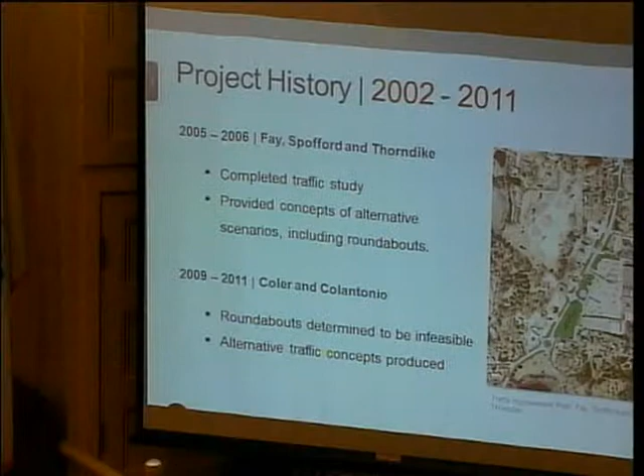I just wanted to remind everybody that back in 2002, we had the Lower Village Committee formed, and that was a subcommittee of the planning board. And their major task back then was to provide some visual improvements and improve the functional and safety capacity of the Lower Village corridor. And that committee lasted for about 9 years, as you can see, through 2011.

Some of the major things that happened during that time that helped get us to this point was in 2005, 2006, they hired a group called Fay, Spofford, and Thorndike, and they did the initial traffic study. So they were the first ones to do the traffic counts and to get an idea what the speeds were. They were also the first group that came out with different alternatives, including the roundabouts that I know had kind of circled for several years.

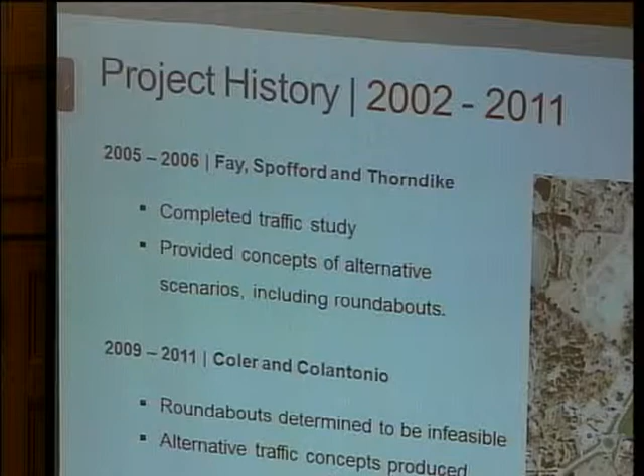It wasn't until 2009 when Coler and Colantonio, another group, came in and really tried to figure out whether or not those roundabouts were feasible. And it turned out that due to site-specific constraints, due to all of the things that were happening at that intersection where we thought the roundabouts might work, it was just too much. And so that idea was abandoned, and they moved on to some different alternative concepts. And so Coler and Colantonio had produced the last concept plan. Some time had passed. We really had a chance to look that plan over again, and it's helped us get to this point. So we can go to the next slide.

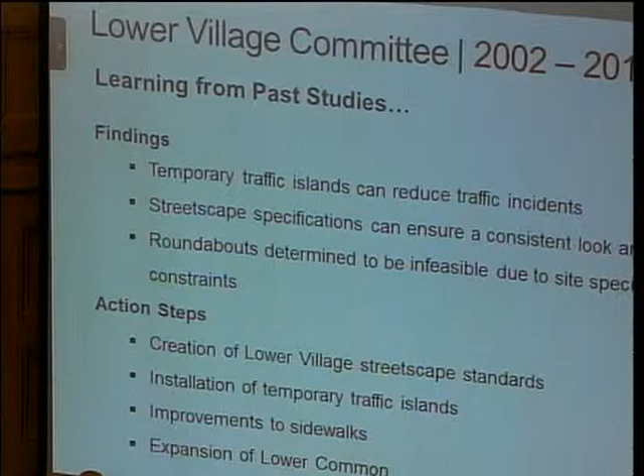So during that time, a lot of things actually came to the surface. Some of the big findings from those 9 years on the committee were that the temporary traffic islands out there that we know and love actually did reduce traffic incidents. Some of the streetscape specifications, down to just the width and the spacing of the trees and the fences, that came from that committee. And they also came up with some action steps as well, creating those streetscape standards, getting those islands in, making improvements to the sidewalk.

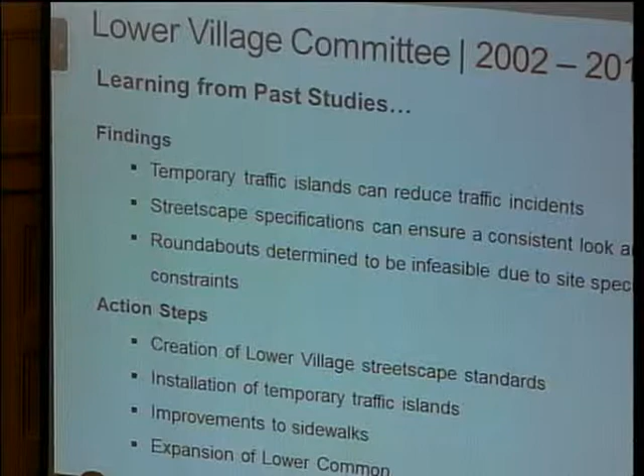I know that's when the Lower Village Common was expanded a little bit, and some things happened over by Gardner Road. So some things definitely happened during that time, but certainly things have been moving faster since we've gotten involved with Howard Stein Hudson, and we decided to take a better look at these concept plans. And they are going to talk to you a little bit about some of the research that they went and did, again, because it had been so many years, and I think we've really got a fresh look at what's going on in Lower Village and a really realistic idea of how people are using it on a day-to-day basis.

So I'm happy to have worked with them. So I'll hand it over to them now. Howard Stein Hudson, Joseph San Clemente and Bridget Myers, who we've both been working with, and they'll take it from here. All right, great.

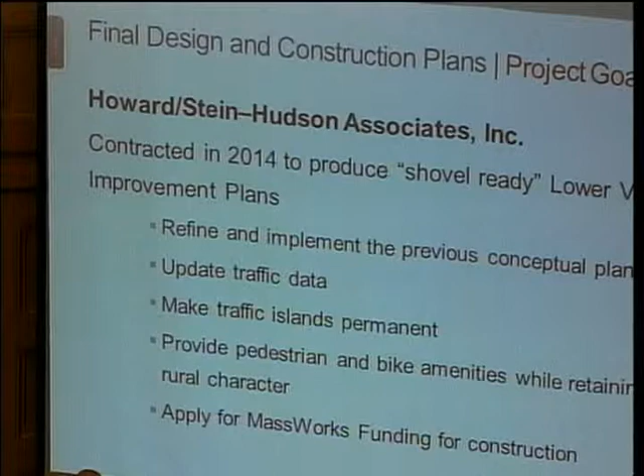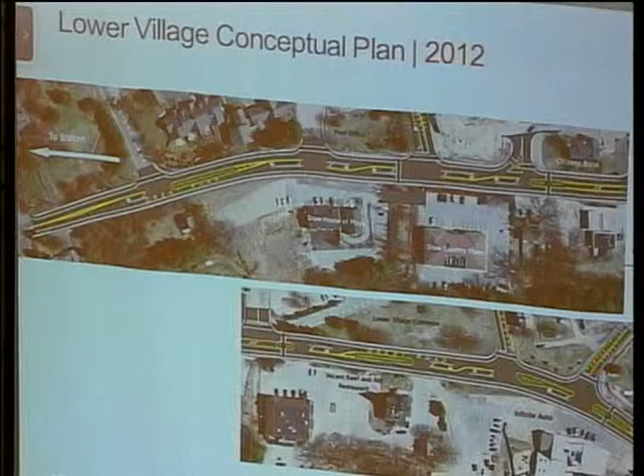And we looked at this and we said, well, let's try to make this a real design plan, moving in with actually collecting land survey data that shows us where the right-of-way is, where property lines are, doing a much more detailed data collection and observations. We're out here during the weekday morning and evening peak periods, and we also came out during a Saturday midday to observe how are left turn conditions, what are pedestrian and bicycle conditions like, what are the queuing conditions.

And we also took a look at vehicle classification. How many heavy vehicles do we have on the roadway? How fast are people traveling? And we also looked at crash data to understand if there are any safety issues along the corridor that we should be aware of. All along while working very closely with the town planning staff and the public works to really understand what some of the key concerns are as we work to refine that concept into a design plan.

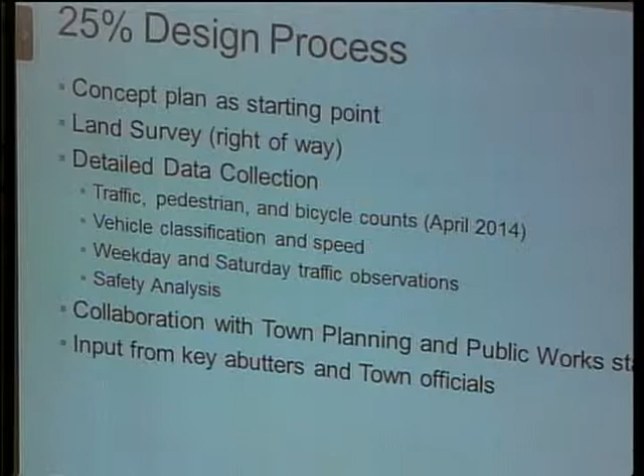And we had also had several meetings with some of the key abutters. I know that the planning staff had additional conversations with planning board members, some of the residents in the area, and we've been getting this feedback pretty much every day over the last couple months as we make small tweaks to the plan to keep moving it along.

So I'm just going to quickly go through some of the data collection efforts that we did and talk about some of the observations that we made. I think a lot of these findings were identified in some of the previous efforts, and if anything, this may either confirm it or expand upon some of the findings that were done before. But we did very detailed data collection.

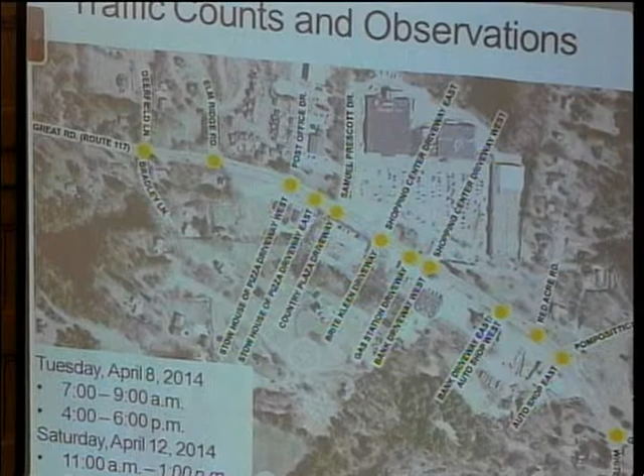These are turning movement counts, counting every vehicle, pedestrian, or bicycle that went through each of those yellow dots in the corridor. There were 12 of them. We counted every driveway and roadway from Deerfield Lane all the way to White Pond Road. And we also conducted continuous traffic recorder counts. Those are the tubes that go across the road so we can monitor traffic over a longer period, not just during the peak hours.

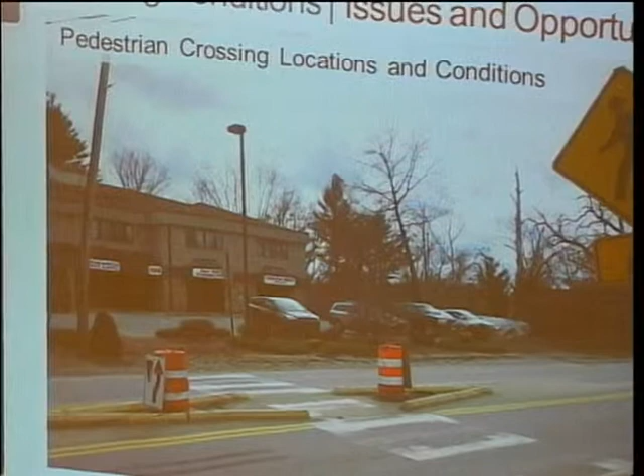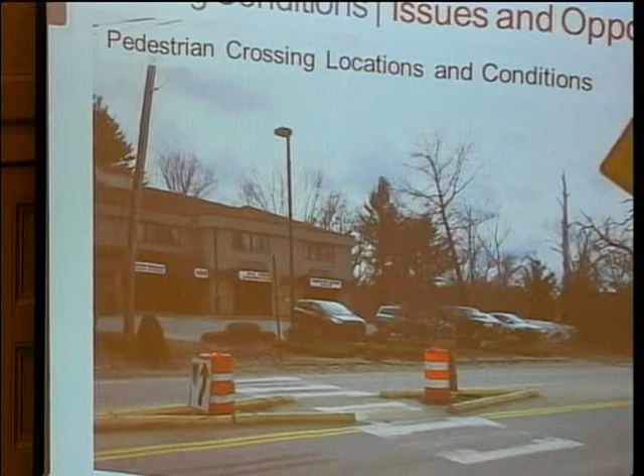Some of the issues that are out there are the pedestrian crossing conditions. Really taking a hard look at where you have crosswalks. There are 3 crosswalks out there today. We do feel that the addition of the temporary traffic islands have been beneficial at maintaining lower speeds in Lower Village, and it does provide some refuge, but it's still a temporary refuge. You don't quite feel that great in the middle of the roadway while you're out there behind the barrels and the curb.

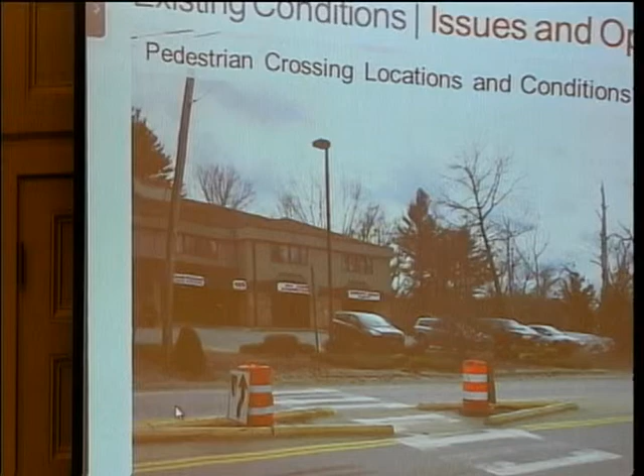Meanwhile, there are some other obvious deficiencies out there. You have a sidewalk along the north side of the roadway, but really it's pretty discontinuous on the south side of the roadway. This particular crosswalk leads into a planted shrub area. It's not really a great connection between the businesses, nor is it handicap accessible.

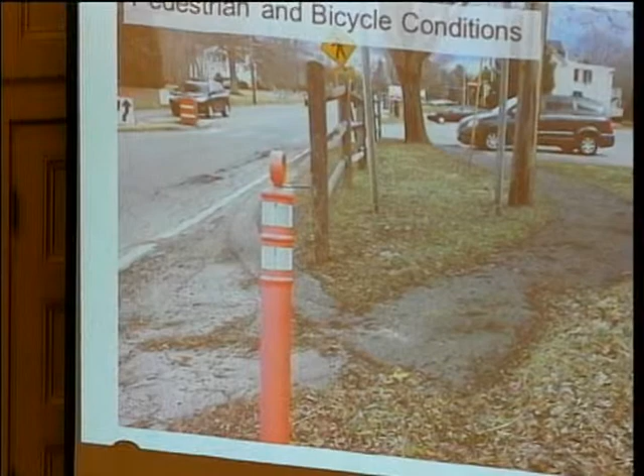Bicycle conditions in the roadway are very minimal. If you're a cyclist, you're really pretty much forced to be in the roadway, which doesn't have any shoulder. The fog line, as you can see, is right along the edge of the roadway. So it's not a great place, even if you're a very experienced cyclist, but it's going to deter anyone that's not an experienced cyclist that's out there.

Meanwhile, this sidewalk is on the south side of the roadway, and it's one of those small discontinuous pieces that kind of meanders around a telephone pole and isn't really in the best shape.

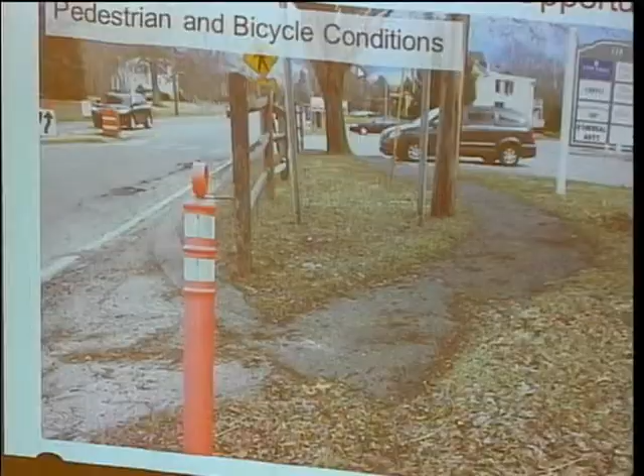Meanwhile, access management is another concern that we have. There are a lot of driveways along this corridor. If you're a pedestrian or cyclist or even a motorist, it means that there's a lot of places where vehicles can be pulling in and out of, which really adds some uncertainty to the roadway. When you're driving down the roadway, where's somebody going to turn in or out of?

If you're a pedestrian walking down the roadway, if you envision that you're adding a sidewalk on the roadway, you don't want to have a lot of these conflict points. We like to try to reduce the number of access points so that it's clear where vehicles are turning in and out of and where they're not.

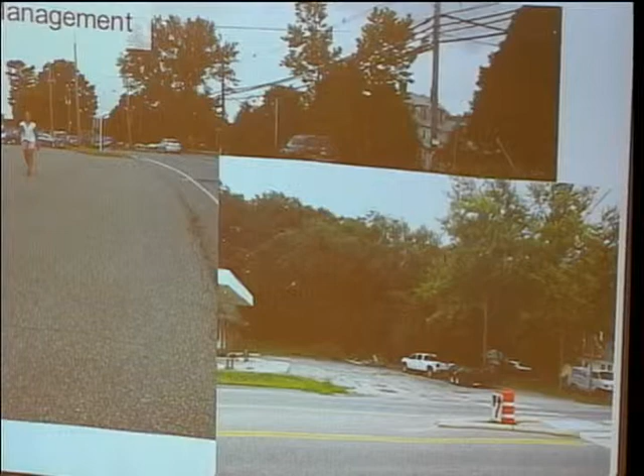Some other issues are down over Red Acre Road and Pompositticut Street, where we have a lot of turning accommodation along the corridor. For most of the corridor, we have a two-way left turn lane, meaning you can turn left in either direction, or we have dedicated left turn lanes. But actually, where you really need the turn lanes, Red Acre Road and Pompositticut Street, you actually don't have a turn lane.

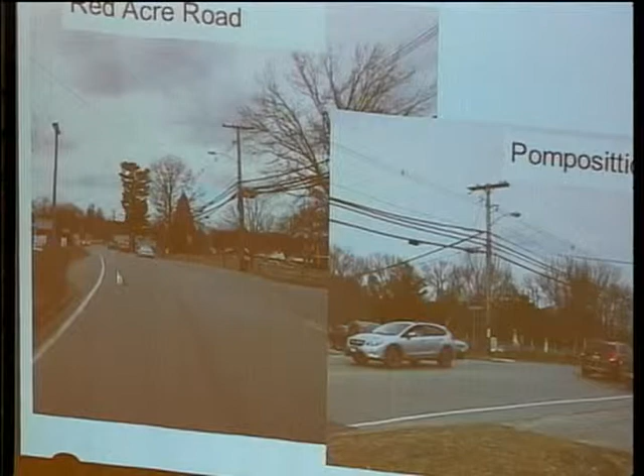It's interesting that we saw this little carve-out near Red Acre Road on the south side of the roadway where a car can just sneak in there and get around somebody making a left. Meanwhile, down at Pompositticut, you have the auto body, the huge curb cut, which actually ends up just functioning like a bypass roadway so people can get around it.

The drainage is definitely something that needs to be upgraded out there. We have undersized drainage line. And the line that is out there, it's a very antiquated pipe. It's in rusted condition, really poor shape. And that's something that we would be addressing as part of this project.

You could see some of the ponding that occurs in the roadway, and asphalt, once it gets wet, you have ponding that just starts to break up. I imagine that those potholes are just going to keep growing over the next few months.

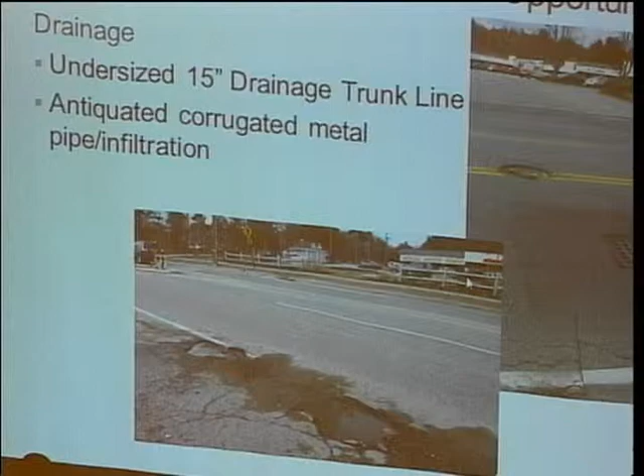And one of the other issues, too, are some of the catch basins. You have catch basins that are in the middle of the roadway, and there's not a lot of curbing on the roadway, so there's nowhere to guide that water and get it off the roadway. We typically like to see catch basins up against curbs to collect that.

So as we started going through some of the data that we collected, just some interesting facts about what we saw out there. Traffic volumes. There's about 16 to 17,000 vehicles a day that travel along Great Road, which is pretty moderate for this type of roadway. It's a major arterial roadway.

But interestingly, in the last 8 to 10 years, the volumes really have not substantially changed. They've remained relatively flat, and this is something that we've seen pretty much statewide, where traffic volumes have actually gone down in the last few years and stabilized over the last 10 years or so. Whether it be fuel prices or the recession or people choosing other alternatives, I'm not sure, but we have seen a lot of volume stabilize everywhere.

The travel speeds, the posted speed limit's 35. The average speed is actually a little bit lower. Most people are going slightly lower, but what we really like to look at are what are the outliers. 2 in the morning, do we have people doing 70? And the good news is that we really don't.

We did not see a lot of excessive speeds. The 95th percentile, these are the top 5% fastest people on the roadway. They're only going 40 miles an hour, 5 miles an hour over the speed limit. So whatever it is that's out there is working.

I think that the splitter islands that act as pedestrian refuges do seem to be helping out there. There's some activity on the roadway that does slow things down. In terms of overall safety, we're not seeing a lot of crashes on this roadway. There were only 28 crashes at all 12 intersections over a 3-year period, which is very low. And when we look at it in terms of the rate of crashes, it's extremely low versus the statewide average.

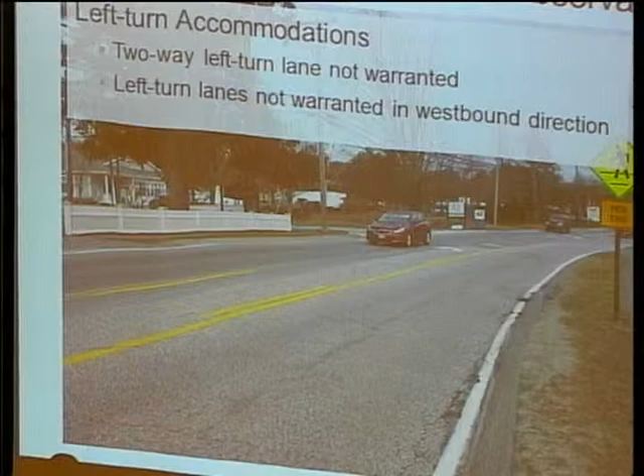For the turn accommodations, we looked at left turn volumes at every single driveway and roadway along the corridor. In order to install a 2-way left turn lane, which is what you have for most of the corridor out there, you need to hit certain warrant requirements. Basically, a certain percentage of left turns versus opposing volume to make it justified to put it in. And what we found out is that the 2-way left turn lane is really not warranted. And actually, by watching operations in the 2-way left turn lane, we found that it's really not functioning that well.

In most cases, when you're down in the west end of the corridor near Deerfield Lane, the lane is simply too small. I think it goes down to about 6 feet wide. A car is about 6 or 7 feet wide. And we're actually seeing cars getting halfway in the turning lanes and blocking the through traffic. So a lot of the turning lane accommodation that we have out there is simply inadequate.

And further, what we found is that if we were going to get rid of the two-way left turn lane and do dedicated left turn lanes into businesses or roadways, there were none required or warranted in the westbound direction. So that means left turns into the south side of the roadway. The only place that a left turn lane was required was the eastbound direction, which makes sense. We have the shopping plaza and the post office, where you have a lot more demand going to.

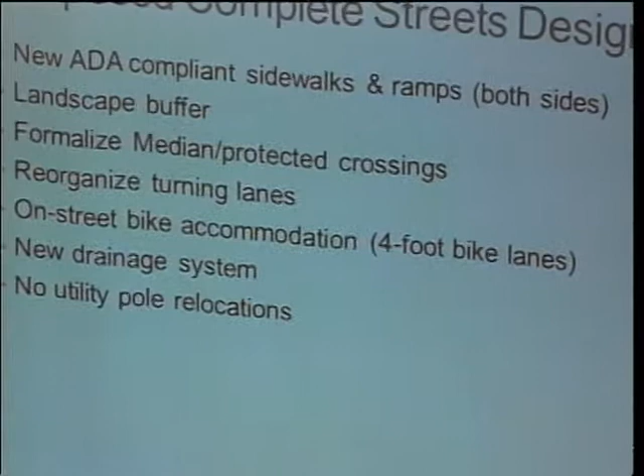So what we propose is a real complete street design for the corridor, improving the roadway so that we have ADA compliant sidewalks, and a bicycle accommodation, which means a 4-foot bike lane, so that those advanced cyclists can get out of the way of the vehicles but have a safe place to be rather than in the middle of the roadway, and they don't have to go on the sidewalk. They have a place to be. Reorganizing all the turn lanes, rethinking where we need turn lanes and where we don't, so that we can reallocate that space for the other users, and providing a landscape buffer.

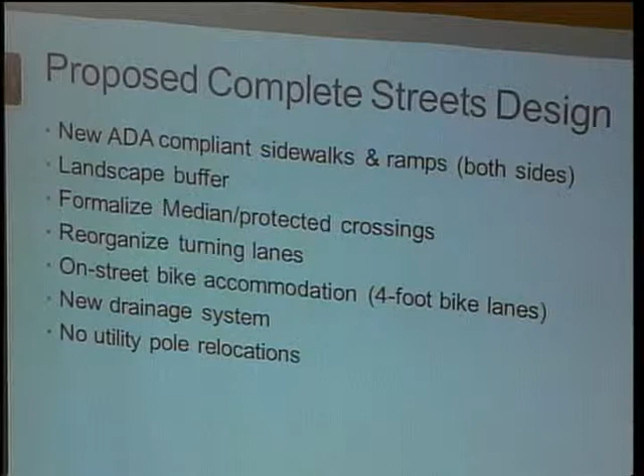So you still have that feel of the roadway, and it separates the sidewalk from the roadway, so you don't feel like you're right on the edge of the roadway when you're walking down the street, and provides some opportunity for landscaping. Updating the drainage system is going to be really important as part of this. And we were able to do all this without relocating any utility poles, which was a heroic challenge; Bridget was able to fit this cross-section in without moving them. Utility pole relocation is expensive and time-consuming, and we were able to squiggle the roadway through, if that's a good word for it.

So I apologize if this is small at the end of the night.

I'm happy to, if you want to see the slide again and come up closer, or I can point it out on the board. But basically, overall what I want to start by saying is that the right-of-way that we have out there is very variable. Often when we work on a roadway, there's a standard 60-foot wide layout or a 40-foot wide layout. But the layout that the town owns for the roadway varies anywhere from 50 to 75 feet. So we had some challenges where the right-of-way changes.

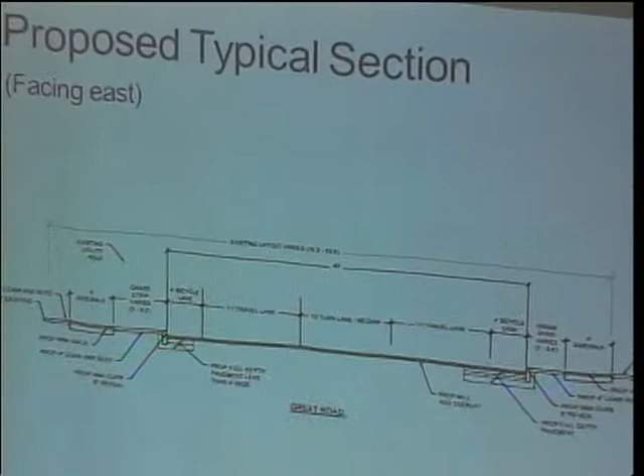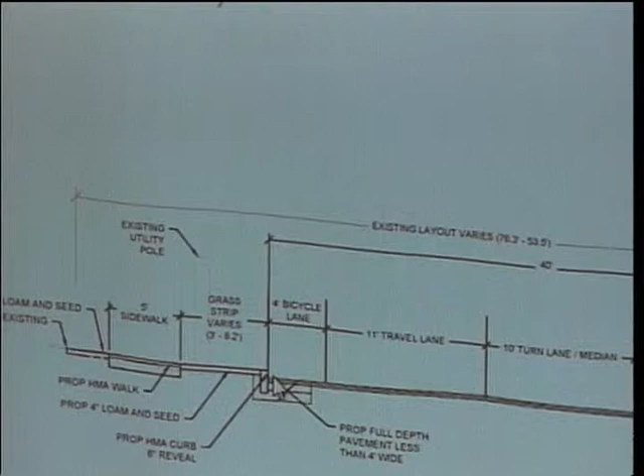We're looking at doing 11-foot travel lanes in the middle, with either a 10-foot turning lane, or in some locations a median. In some cases the median would be raised, in some cases it would be a painted median. And I can go into detail with that. We'd have a 4-foot bike lane, and then we're looking at a raised curb on each side, but it would be an asphalt curb. That would be the black curbing, not granite.

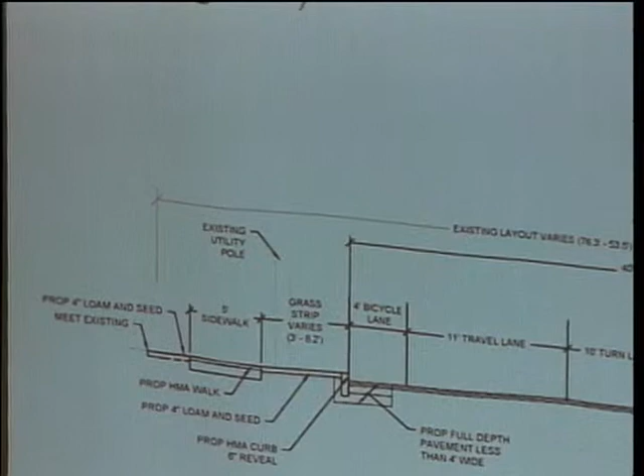And then there would be generally at least a 3-foot grass strip on each side, separating the 5-foot sidewalk from the roadway. In some cases, that grass strip will get a little bit bigger as we work to meander the sidewalk around the utility poles, so we don't have to move any of those. There are 4 pieces of the plan that I'm going to go through, and once again, if you can't see it, I'd be glad to walk you through afterwards.

This is the western end from Deer Field Lane to Elm Ridge Road. One thing that was really challenging was trying to figure out where to put the crosswalks and where to put the turn lanes in relation to the crosswalks. As you get up just east of Elm Ridge Road, over near the pizza place, there's what we call a crest vertical curve. So it's a hill in the roadway alignment. Unless you put the crosswalk right on top of it, it's not a safe place to cross the street because you can't see the cars coming over the hill.

So what we chose was to have it on the farthest end, the west end, where you actually have good sight lines to that hill. It actually allows people coming from Deer Field Lane to cross, and I know that there are some playing fields down on the south end of the roadway, and working with the town, we thought that might be one of the best locations to put it.

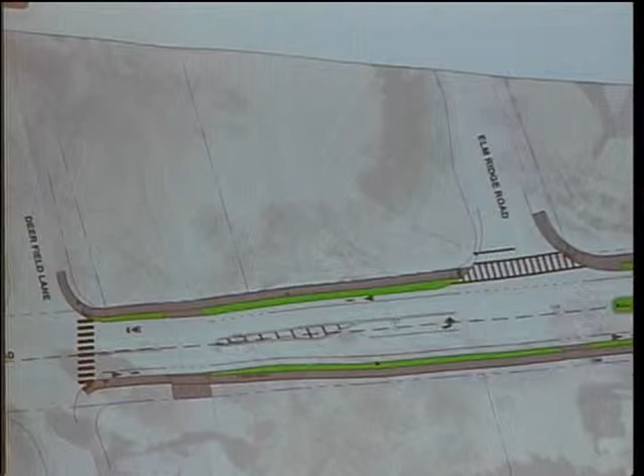As you'll see, we do have a left turn lane going down Elm Ridge Road, and then we do have a raised curb median in a few locations. I'd be happy to answer questions at the end and talk about some of the rationale. What we tried to do on each end of the corridor was to have some raised sections in the roadway, so that if you're a motorist entering Lower Village, you say, hey, something different's happening here, I might need to slow down because this is a pedestrianized area. And we do feel that those islands in the middle of the roadway do help to calm the traffic out there.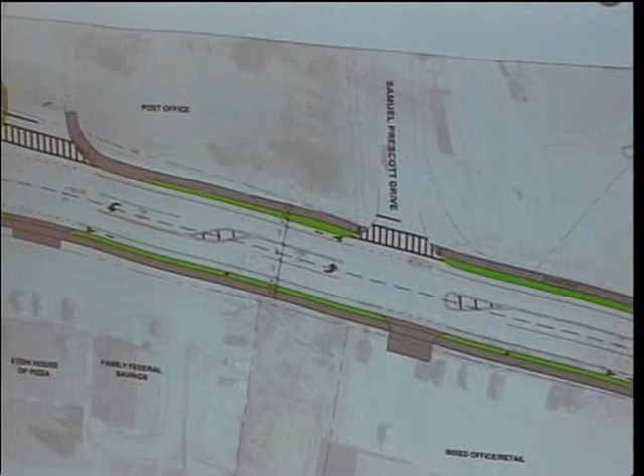Going down a little bit further, this is over at Sam Prescott Drive and the post office. The one location where we do have a westbound left turn lane is into the House of Pizza. It was the only place that had enough volume to really justify it. But then we'd have dedicated left turn lanes going into Sam Prescott Drive, and then into the shopping plaza. And then over here is another mid-block crossing that's protected by islands so that you have a refuge. You only have to cross one lane at a time as you're getting across the street.

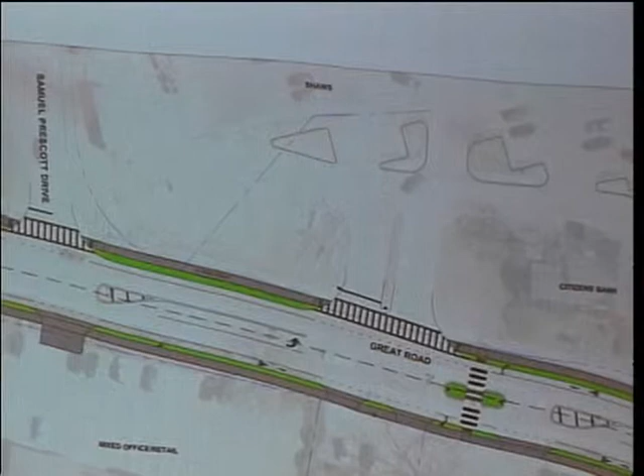And then here's further down the road towards the common. In this section, we have another crosswalk with another refuge. And then over here, this is actually a striped center island in the middle that will help visually narrow the travel lanes so that people don't feel like they have this great wide roadway out there.

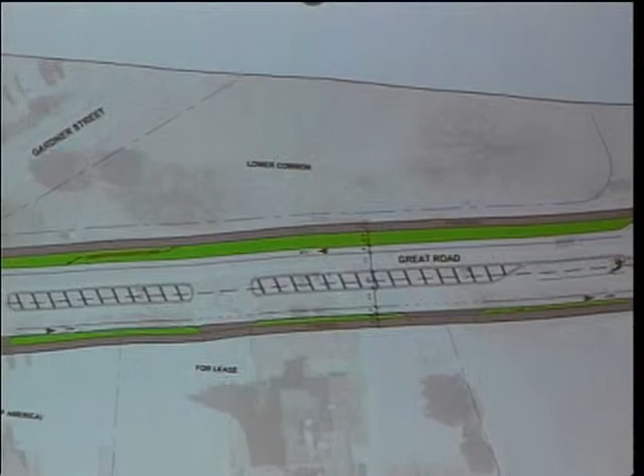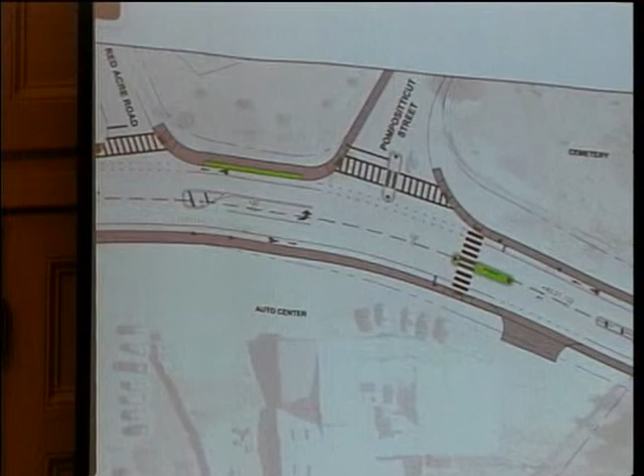And then we were also proposing to add, actually let me go back to the other slide. This left turn lane is into Red Acre Road, where we currently don't have one today. And then there's another left turn lane going into Pompositticut Street. And then this goes all the way down to White Pond Road, where we would end our project limits.

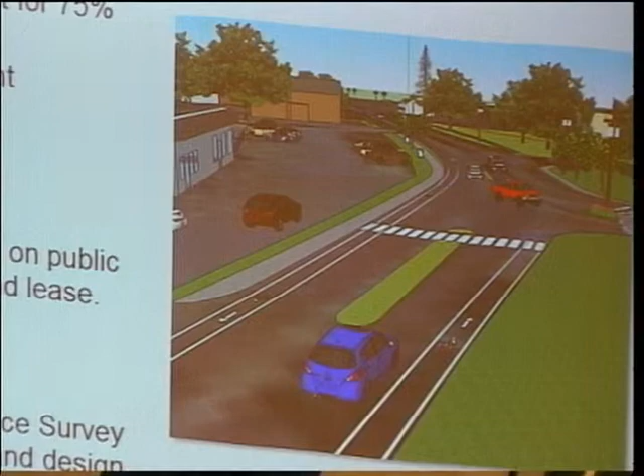And so with that, I'd just like to get into some of the next steps. We're here tonight presenting you the current design that we have. We're working towards completing a MassWorks grant application with the state for funding. That grant application process requires that you have a very developed plan set, that it's pretty much shovel ready to go in the springtime, which would be then we're envisioning about a 1-year construction period if the project is selected.

What we'd like to do is collect as many comments tonight as we can over the next couple of weeks to be able to keep revising the plans, and then that revised plan set will go in with the application package. And with that, I'll hand it back over to Jesse. Yeah, I'm just going to go over a couple of where we go from here and how this fits into the bigger picture of some of the Lower Village planning efforts that we've been undertaking here.

So this fall, we're going to continue working with some of the property owners down in Lower Village, some of the business owners, to try to come up with a way to increase the water infrastructure down there. The governor just recently signed a bill that allows for exploration of water down on Heritage Lane, which I know went to town meeting a year or so ago. And so we're hoping that we can at least get that exploration underway and see if it's feasible.

One of the things we're going to be doing in the meantime is working with the state to come up with the kind of language that would help us craft a lease that would help the town do this and help us work with the business owners. So it's a public-private partnership is what we're hoping for, and it's really a key to unlocking some of the potential down in Lower Village. So that's going to be ongoing.

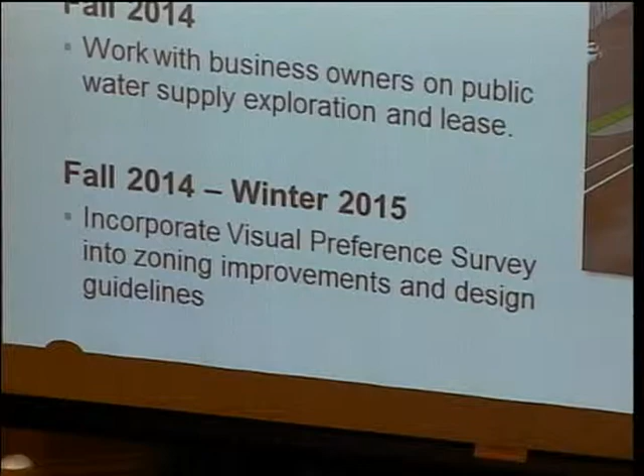And then as we go into winter of this year, what we want to do at the same time is think about what that village looks like right now, how these traffic upgrades would also work hand in hand with the kind of design that may happen if new development were to start taking shape down there. We know we have some property owners who are itching to get going. Should water be available, we want to make sure that we're having the kind of development coming in that actually complements the road upgrades that we just went and undertook.

Some of those things, we've talked a lot about the deep setbacks. We've talked a lot about the design of the buildings. We've heard a lot at our other meetings about kind of the rural character and this kind of respect for the history of Stow and for the region as a whole. And so we want to try to incorporate these things in a holistic way rather than piecemeal. And that's why we've been kind of trying to take on a lot of these issues all at once so that we can actually build something around some of the traffic upgrades. So that's what's coming up.

We're certainly going to be having some more meetings and some more trying to get at some of those design issues. But I'm going to hand it back over to you folks in the audience just to have some questions answered. Yeah, it would be best if folks would come up to the microphone. We are taping it, and it's great for everybody to be able to hear it. So thank you.

I noticed you only designed 4-foot bike lanes. Yes. And those are not compliant with the AASHTO guidelines. Mm-hmm. They're with curbs. Yep. The guideline is to have 5-foot bike lanes, not 4. And actually, the travel lane at 11 feet is actually rather small. So usually the accommodation in that case is actually make the travel lane larger and not mark a bicycle lane. Is that considerable?

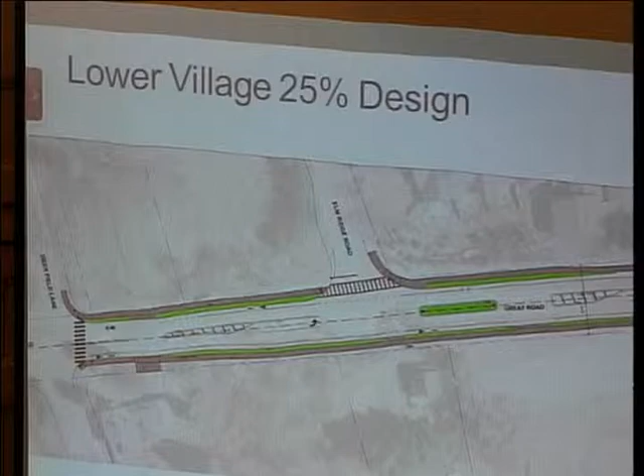It's going to be very hard to make a turn when there's a raised structure there. And plus, what happens when it snows with the plowing? They already plow me in every time they plow, so I'm afraid with a raised structure that's going to be even worse. That's my big concern. I had another one and I can't remember it now. But I do want to remind you, it is a residence. I don't know why it's zoned commercial. I would like it to be treated like a residence and not like a business. Yeah, absolutely. I appreciate the comments. Thank you.

Yeah. Well, hold on. If we could just let her go first, let her comment. Thank you. Jean Romer, Warren Road and Stow. I have lived in Stow for a long time, and Stow has not thought it appropriate to plow the sidewalks in winter. I think that the policy should change with this.

I don't know what is said about that in the new regulations for sidewalks, but I know that a lot of people jog and run and walk along Great Road in the winter, including me walking sometimes. And I've tried to walk where the snow has been plowed, but often people are walking on Great Road and it just seems incredibly dangerous. If you go to all the trouble to install sidewalks, I think they should be plowed.

So that was one. And the other thing is, I think it's great to have attractive fencing and vegetation and landscaping. I think it's just really important also to make sure that for cars pulling out on 117, either east or west, that the fencing and vegetation doesn't impede their view. I think some of it does a little bit now, and I would just like to see it low enough or back farther so it doesn't do that. Agree. Thank you very much. I don't know if-

And then moving down the road where the auto body, they have about that 200-foot wide curb cut today. We're looking at it going to about, I think, 50 feet and moving it. We generally like to line curb cuts up with roadways and the driveways, but in this particular case, we felt that this one should actually be offset from Pompositticut just because of the heavy left turn volume in and right turn volume out. So I hope I answered your question.

On the House Pizza, the one that you added on the west side. I'd be afraid that that is right at the end of, that's within where the ground is pretty high, that people aren't going to see that. Because it's sloped up there right now. We try to get it actually right at the top, because we're worried if you're on either side of the hill, then you wouldn't be able to see it.

Getting out of there, though, you're going to have to go up a hill to get out onto the road. That's going to cause some problems. Well, this is actually about the high point in the roadway. What's that line there? Is that the right-of-way? No, it's hard to see, but that's actually a cross-section dimension on the plan. I apologize.

I do a lot of biking down there. I don't know if I was one of the 8 that you recorded or not. Yeah, you might have been. But actually, I find a 4-foot space, especially since essentially it's one way, there's really 8 feet of bike space, right? You've got 4 going east and 4 going west. It's better than nothing. I like having it delineated with a line versus something that you're not necessarily sure where you are versus where the cars are.

So I think overall, this is a very nice design. I'm almost sorry to see the roundabouts go, because I thought that would have been intriguing, but this is a nice design. Thank you.

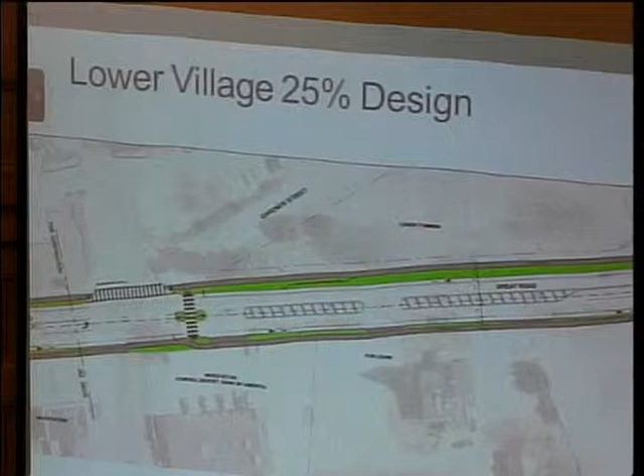Did you consider moving Red Acre Road over? I mean, there was obviously that room in the common, except for the trees that are there. The Red Acre Road could actually be moved considerably, like 25 feet. That would greatly increase not only the storage capacity of the left turn lane, but also the interval between the two roads as people are entering and leaving.

I think, as I said, when we got into this, we really looked at a lot of the feedback that happened in the prior planning sessions and all the different concepts. And the direction that we really started in was not to make substantial geometric changes, just because there was no general consensus on what the best approach was to do it. Also, the other consideration is cost, too. If we move the roadway, we're looking at a full depth construction to move that roadway over. And so it's another item that we had to be cautious about to try to get as much improvements as we could. Thank you. Yeah, thank you.

I just wanted to point out that when we were working with Kohler and Colantonio before you came on board, the planning board vetted many, many, many different concepts and scenarios, which involved using the common, the town lands, and couldn't come up with anything that was really feasible that would work. Right.

Jean Romer again. I just wanted to make one more comment on the sidewalk and also to ask if anyone here knows what board I would go to discuss this further: the idea of having the right equipment to plow a sidewalk in the winter. The selectmen, is that who I would go to? Because I was part of the original sidewalk committee that instituted the sidewalk from Harvard Road to the center of Stow. And it's bothered me since then that the sidewalk was put in but never plowed. And now it's been expanded, which is really nice, along the center of the town. And I think the sidewalk gives Stow a small town feeling.

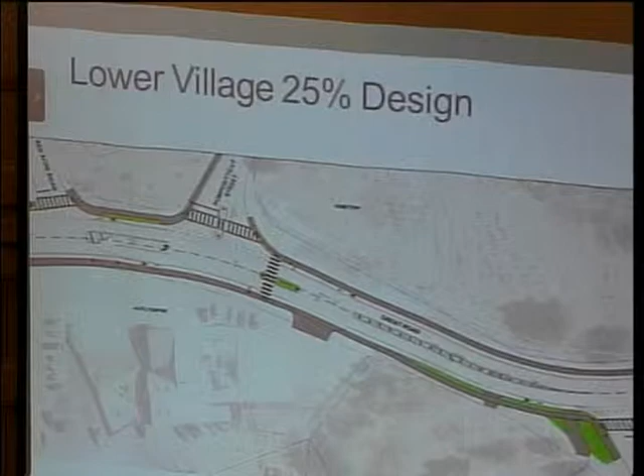Where do the sidewalks end going eastbound? Eastbound, they end at the project limits, which is just to the east of White Pond Road. Okay, so beyond the project, is there any consideration of taking that all the way into Maynard? Because right now, if you want to walk down to get an ice cream, you're putting your life into your own hands.

So the last round of the sidewalk committee I was on, we basically created a priority for the town of, if we're going to spend money, where should the next sidewalk go? Definitely along 117 to get to Erikson's. We all want to get to Erikson's, it's up there on the list. I'm not saying or promising that the town's about to spend any money on it, but as we look towards where the next sidewalk should go, I know it's pretty far up there on the list. I don't know as we can build a sidewalk into Maynard, though, to get that last little distance.

But speaking of costs and such, I think I know the answer to this, but maybe for the record and the edification of this, I stepped out for a minute, so if I'm repeating, I'm sorry. You mentioned the construction is kind of driven by the amount of the grant that's available. In a way, that's kind of backing into things. In an ideal world, you'd say, well, what is it we want to build? And then there are tiers of grants, if it's 1 million or 3 million or whatever it is. But what is the number of the target grant that we're looking at for this project?

The grants are generally about $1 million, whereas the project we have now is slightly over. We have seen projects get awarded slightly over if they're close to that amount. I think we had a project in Weymouth that had that situation where they were slightly over that amount, and they were awarded the full amount. Yeah. So that's about the ballpark that we're looking at.